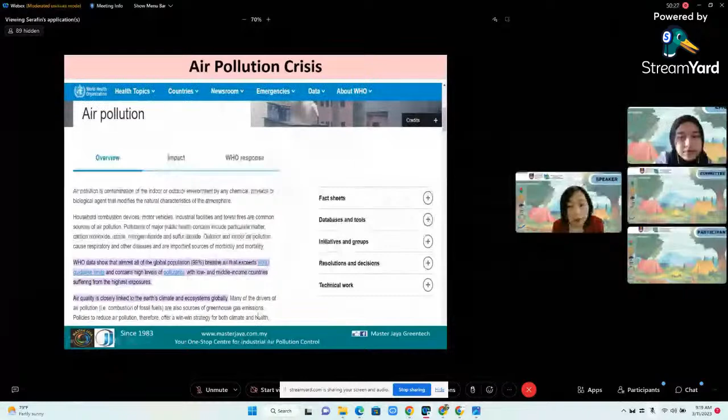This is also from a WHO report. How many people die every year from this? This statistic shows 7 million people die prematurely every year — not accumulated, this is yearly — from both household and outdoor air pollution. 7 million is a very serious, very dangerous, scary figure.

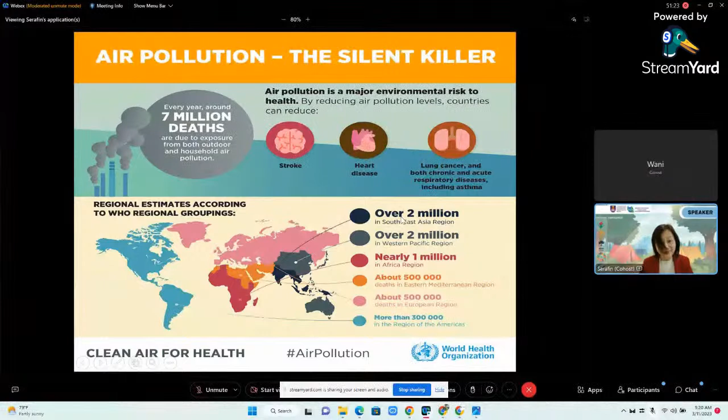Let's see where Malaysia is. Malaysia is here. Out of the total 7 million deaths, let's see who is ranked number one — over 2 million is from Southeast Asia. Where is Malaysia located? We are right in the center of Southeast Asia, which means our air pollution problem in Malaysia is also one of the highest risks worldwide. We are the top on the list.

And look at who is last — of course, the light blue color here represents the American continent, South America and North America. Then the last one is about 500,000, which is from Europe.

If we compare in terms of area, Southeast Asia is one of the smallest continents compared to Europe or America. But sadly, the truth is, although we are one of the smallest in area, our air pollution problem is the most serious in the world. So we have to do something. I'm very happy that UiTM organized this very meaningful series of talks that covers not just air pollution, but water pollution and waste management too.

Let's look at a bit about air pollution. So today in this 1 hour talk, I will focus more on industrial air pollution, about factories and manufacturing plants in Malaysia.

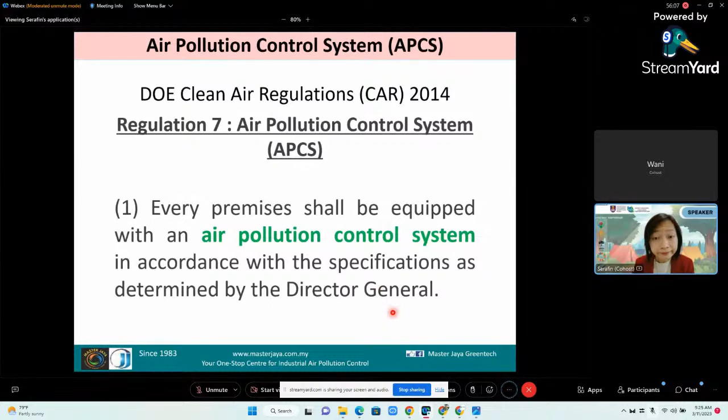So there's another regulation called regulation number 2, interpretation. Interpretation basically means the definition. So in the DOE regulation, what is their definition of air pollution control system? Because regulation 7 says that every factory must install APCS.

So what is APCS? APCS means any facilities designed or constructed for the purpose of preventing or reducing potential emissions that can cause or that cause air pollution, and it must include: number one, extraction system; number two, control equipment; and number three, chimney. These three key components must be included in any air pollution control system.

Let's look at this simple sketch to show, ladies and gentlemen, what an air pollution control system is. Now some of you studying environmental subjects, I believe you also study about air pollution in your courses. Basically, we should have about 5 components in a complete air pollution control system.

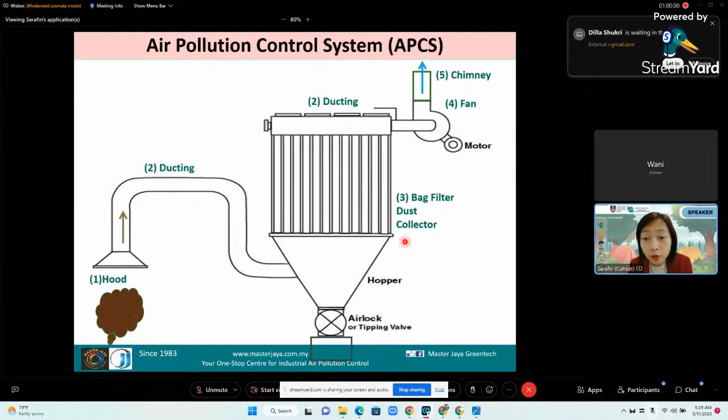So to make it easy for you, I put it as 2 main categories. One category is the type of technology that factories can install to control or filter dust particles. For dust, to control dust particle, we have the types of APCS: number 1, settling chamber; number 2, cyclone; number 3, bag filter dust collector; number 4, electrostatic precipitator; number 5, wet scrubbers. Of course it's not just limited to these 5, we also have other types of APCS, but these are some of the most common ones, most commonly installed in factories.

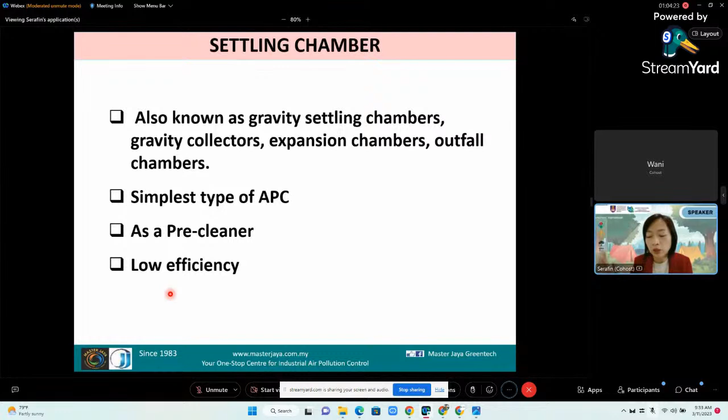Very simple, empty box. Let's say it's just an empty chamber, a big empty chamber. It's an expanded empty box. What do we have inside? Basically nothing, empty. There's no filter, there's no water spray. So that's why we call it an empty chamber, but it's an expanded empty chamber. We expand the size to reduce the velocity, to slow down the speed, to slow down the transport velocity.

So when the velocity has slowed down, what do you think will happen to the dust? Yes, you're right, the dust will slowly settle. So therefore we call this settling chamber. Some people call this gravity chamber, gravity settling chamber, because the operating concept is very simple: let the dust settle by gravity.

Now this type of APCS is good for, now what do you think? What kind of dust? Is it more suitable for heavy dust, or is it better for light, fine dust particles? Yes, you're right, this type of settling chamber is more suitable for heavy dust, big particle, heavy particle. So efficiency will be better for heavy dust and big particles. But if the incoming dust here is all fine dust, very light dust, then this type of APCS is not so suitable.

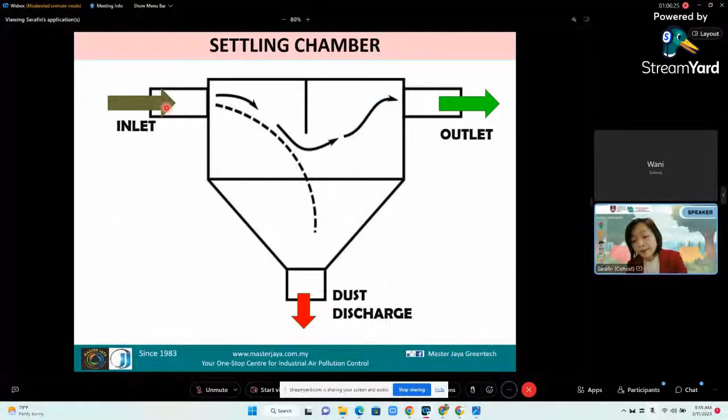Right, second type of APCS is called cyclone. So cyclone is also commonly used as a pre-collector now, after the new clean air regulation was enforced. I still remember which year. So DOE enforced the regulation, clean air regulation, on year 2014. This is the newest clean air regulation.

Now before 2014, did DOE in Malaysia have any law? Yes, of course. So DOE actually enforced the first clean air regulation in year 1978. I think before that, most of you were not born. All right, so in 1978 we already had a clean air regulation. Now that was an old clean air regulation with much looser standard limits.

The limit at that time, for example, for dust particles, was only 400 milligrams. In 2014, DOE totally changed to a new regulation, reducing the dust emission to a maximum of 150. So from 400 in the 70s, 80s, 90s, 2000s, then in 2014 DOE has reduced it.

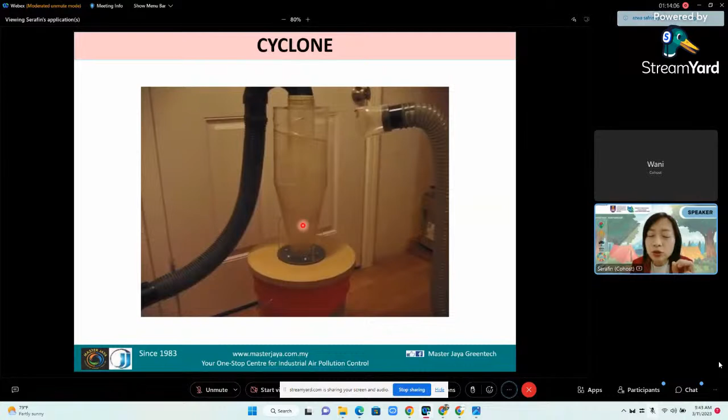But of course, if the dust is too light or too fine, we cannot trap all, or even 90%, of the very light and fine dust, because it can still escape from the clean air outlet.

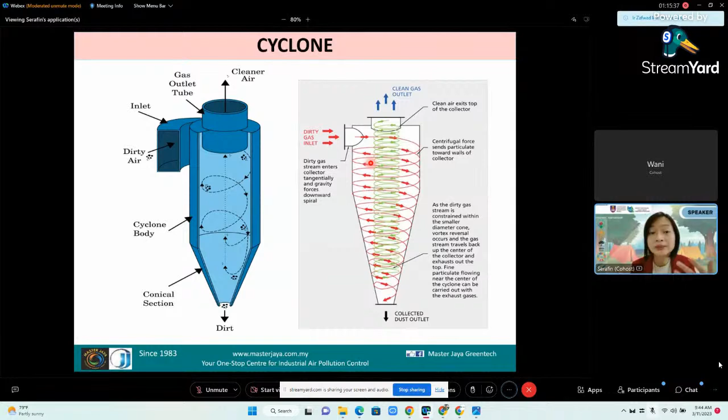So this is not good news. Therefore we say cyclone is not considered high efficiency. We classify it as low to medium, depending on how we design the cyclone. Some cyclones can achieve medium efficiency, but some can only get low efficiency.

Next, let's look at bag filter dust collector. Another name for bag filter dust collector is baghouse, or dust collector, or bag filter. Some factories call it pleated filter or cartridge filter. So there are many different names for this type of APCS.

Operating principle: use filters to separate or filter dust particles from dusty gases. It is one of the most efficient, most cost-effective types of APC equipment, compared to settling chamber, cyclone, which we covered just now, and wet scrubber.

If you want to design a technology or control equipment to filter dust particles, regardless of whether it's fine dust, coarse particle, big particles, small particle, heavy dust particle, or light dust particle, bag filter dust collector is definitely one of the best choices, because it gives the highest efficiency of more than 99%. The filter can trap a minimum of 99%, up to 99.9%, of even very fine dust particulate.

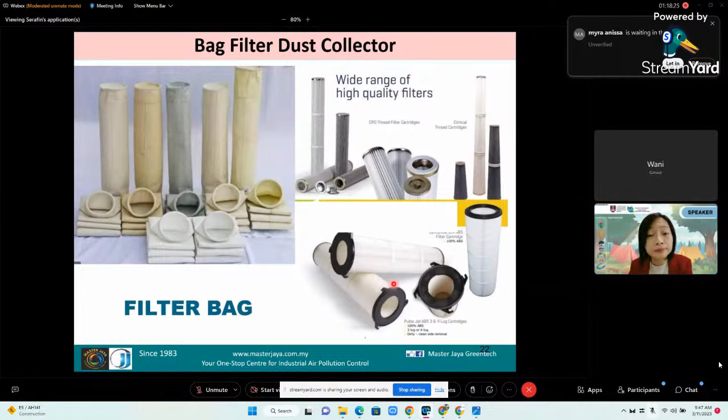So this is how we install the filter in the dust collector. Externally, you will just see a square box, a rectangular box, a chamber. Internally, inside, we install filter bags. We have an inlet for the dirty dust to come in, and an outlet for clean air to release out after filtration. So inside, we have filter bags to trap and filter the dust particles.

Of course, sizes can be custom made. So all the air pollution control systems can be custom made.

So some features of bag filter dust collectors. The advantage of bag filter is it's a dry system, so the dust that we collect will still be recovered dry. For instance, in a plastic factory, they generate plastic dust in a cutting process or a grinding process. If we use a bag filter dust collector, we can collect back the powder in the original dry plastic powder form. So this is one of the advantages.

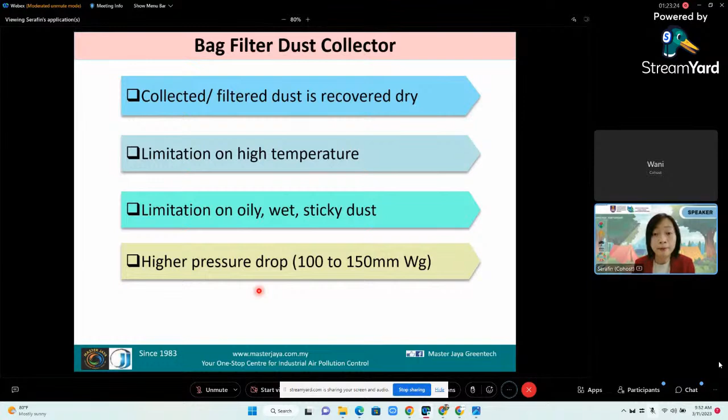So of course, bag filter dust collector must come with an automatic cleaning system. Because the technology we use in the factory needs to cater for continuous process, running 24 hours. Manufacturing normally has to run production 24 hours non-stop. Therefore engineers who work in the plant sometimes work in shifts, morning shift, night shift, because the process cannot afford to stop. It must run 24 hours continuously non-stop.

So ladies and gentlemen, I have a question for you. If we run the dust collector bag filter non-stop 24 hours, continuously dust comes in to the filter and sticks on the filter bag, what do you think will happen? What do you think will happen to the filter?

Now let's look at these filter bags. Inside the dust collector we have filters installed. Dust will come in 24 hours non-stop, the fan runs 24 hours, suction 24 hours non-stop, so the dust will stick on the filter bag non-stop, 24 hours continuously. So what do you think will happen to the filter bag after a few hours? Yes, you're right, the filter will be choked, full of dust.

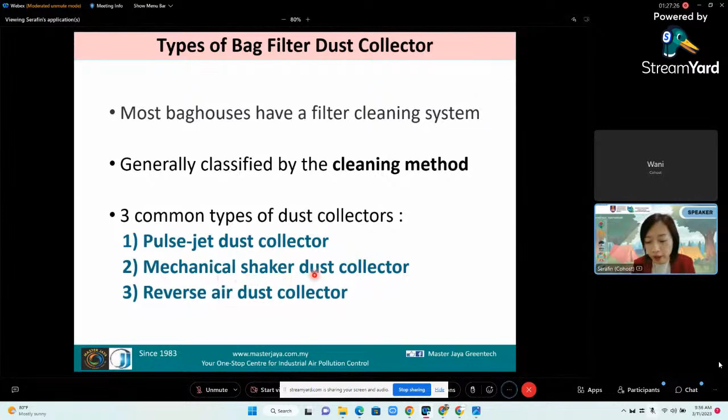Oh my God, the operator has to manually use their hand to shake the filter during the tea break, during the lunch break. So this one we definitely don't recommend because it's very taxing for the operator. High labor, they need to depend on manual cleaning. And if manual cleaning, they can't operate the dust collector 24 hours. They have to stop the filter just for cleaning purposes.

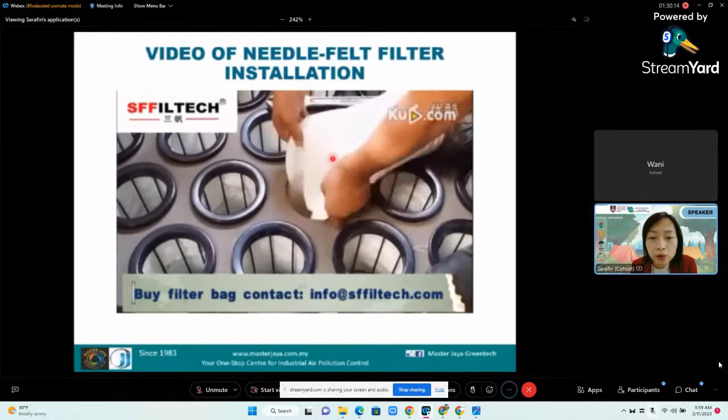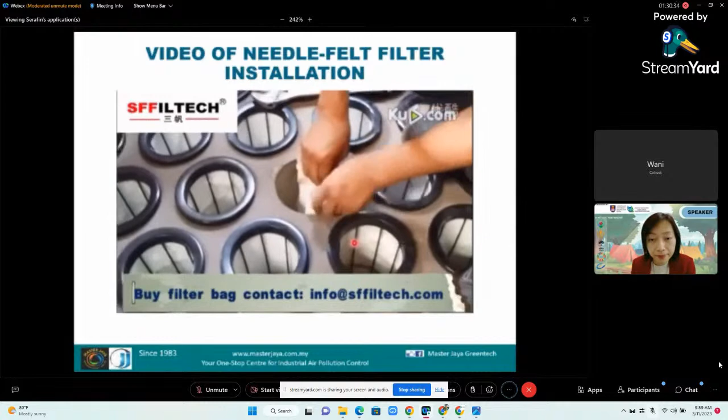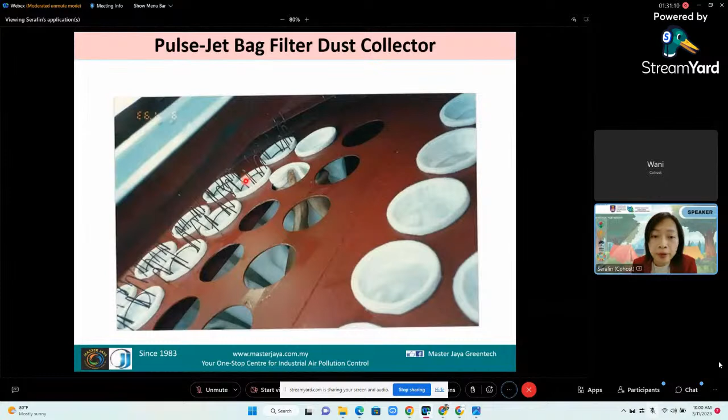Install the bag, make sure it's airtight. Next, slot in the bag cages. So this is how we install the filter. First we slot in the filter, the white color, this is the filter. The top part here has to be airtight to prevent any dust leakages. Then internally we have a support structure to support the shape of the filter. This component we call bag cages.

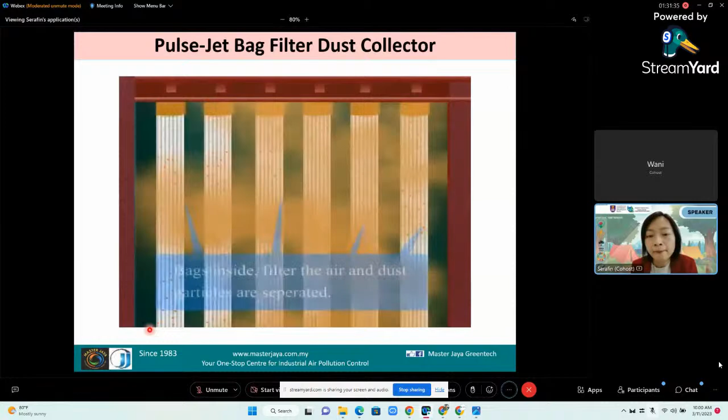Okay, an animation to show you how a pulse jet bag filter works. First of all, on your bottom left hand side, this is the incoming dust coming from the ducting. We call this inlet ducting from the process, from the machine, cutting process, grinding process, from the furnace. So dust will come in and stick on the surface of the filter bags. This is how the dust is separated, using the filter to trap the dust particles.

So clean air, filtered air, will pass through the filter, go up to the clean air chamber on top. Then the clean air or filtered air will release and escape out. Here we have an outlet, we call this the clean air outlet. The clean air outlet is normally connected to a suction fan, and then to a chimney.

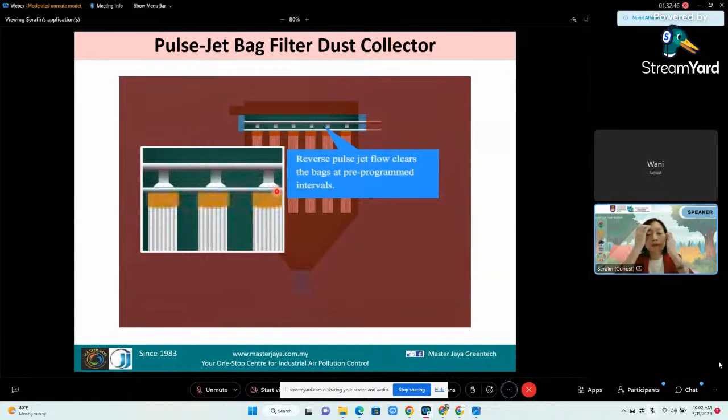Now inside, on top of the clean air chamber, we have pipes. These pipes are for compressed air to come in, to blow in and supply compressed air onto the filter bag. Once compressed air is blown on the filter bag, it is being cleaned. This is the compressed air purging, blowing, or pulsing on the filter. Now, every time we blow compressed air, the filter will actually expand, creating vibration for the dust to release from the filter.

So the dust will drop. Dust particles accumulated on the filter bags will get detached and fall into the hopper after the pulse jet cycle - meaning the compressed air cleaning cycle. This component at the bottom, the pyramid or cone shape, is called the hopper. The dust will drop into the hopper and then discharge out. Of course, we don't let the dust just drop onto the floor - in the factory we install a proper dustbin to collect all the dust particles.

So this is how a bag filter dust collector works. This is one of the most important, most widely used technologies in the industry now to filter dust particles. So I will spend more time on this because it's the most common one you will see in the factory. It's suitable for 24 hour continuous process - meaning during the pulsing, during the cleaning, when compressed air blows in, we do not need to stop the suction fan.

We don't need to stop the fan in order for the compressed air blowing. No, suction and compressed air cleaning will operate together concurrently. Therefore, we say this pulse jet dust collector is suitable for 24 hour operation, continuously non-stop. It will not affect the production downtime, and production don't need to stop just for the purpose of cleaning.

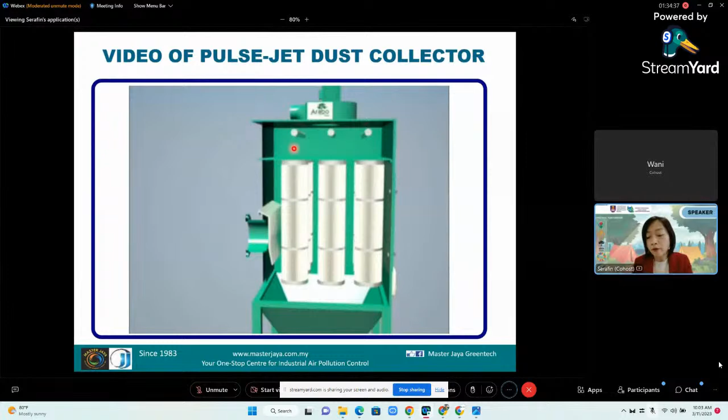So this technology is designed for 24 hour continuous process. This is one of the most commonly used types of technology, applied in almost every industry for powdered and granulated material, high efficiency, 99% and above. You name it from A to Z, all kinds of powders. Our group, Master Jaya, we have designed, supplied, and installed more than 1,000 sets of bag filter dust collectors to various industries, A to Z: aluminum, asbestos, carbon, cement, ceramic, chemical, flour, food industry, glass, pharmaceutical, plastic, sugar, tobacco, wood, metal processing, and many, many others.

So here, I just want to share some of our installations of bag filter dust collectors in a factory. There are two types of APCS technology installed here, A and B. A is a pre-cleaner, an empty chamber, no filter inside. A is an empty chamber, pre-cleaner.

B, inside B we install filters, we have filter bags. So ladies and gentlemen, do you know the name of this technology? What is A and what is B? The answer is yes, A is a settling chamber.

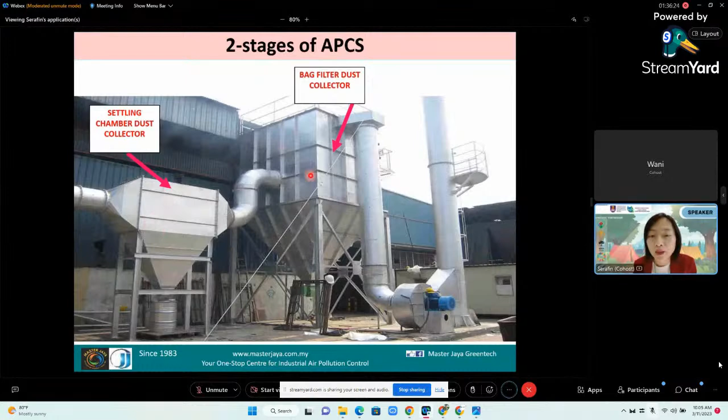Now, what about this one? We have A and B, two different technologies, two different types of APCS, both for dust particles. B, just to give you a tip, B is a pre-cleaner, empty cylinder. Inside B has nothing, no filters. B is empty. So do you know what is B? A, inside A we have filters. So I think you can guess already by now what is A and what is B.

Yes, you're right, A is a bag filter dust collector, B is a cyclone. Now, so which one will the dust enter first? Will the dust go into the filter first, then to the cyclone? Or go into the cyclone first, then to the bag filter? Yes, the answer is definitely the dust will enter the cyclone first, because cyclone is a pre-cleaner to remove the heavy dust particles and the big particles.

The fine dust from the outlet of the cyclone will then escape. Then only we go into a bag filter to remove the balance, 99%, 99.9% of the fine dust, all trapped by the filter. Then clean air escapes. So this is one of the very common types of technology installed in industrial premises.

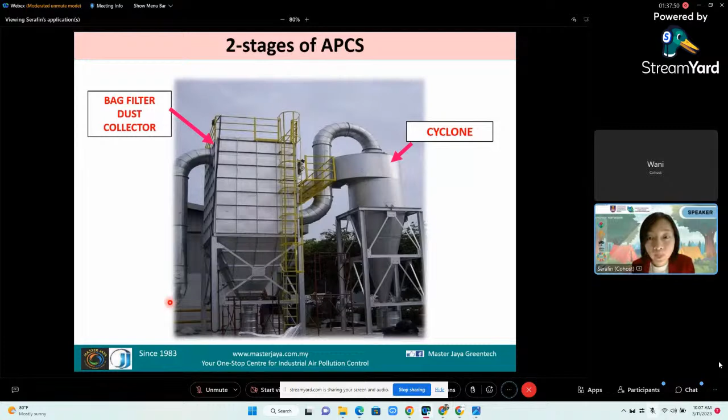The next type of APCS that I would like to share with you is the wet scrubber. Due to time constraint, I can only share more on this bag filter and scrubber. Wet scrubber is also another very common type of technology installed in factories. The difference between wet scrubber and bag filter dust collector is one is a dry system. Bag filter dust collector definitely is a dry system, used for dust filtration, mainly for dust filtration.

Wet scrubber, no filter, they don't use filter. There's no centrifugal for spinning. It uses liquid, it uses water. We spray water in a wet scrubber, we supply water, we pump water in a wet scrubber. We use water to absorb, to remove the pollutants. What are pollutants? Both - we can use it to treat gaseous pollutants, like acid gas, alkaline gas, sulfuric acid, hydrogen chloride, chlorine gas.

Wet scrubber can be used to trap dust particles, and at the same time also used to trap gaseous pollutants - 2-in-1. Can be low, can be high pressure drop, because there are many different types of wet scrubbers. Disadvantage of wet scrubber is definitely, yes, you need water, you need continuous supply of water, because we use water to absorb the pollutant. It's an absorber basically, so therefore wet scrubber can also be called an absorber, using liquid water to absorb the pollutant.

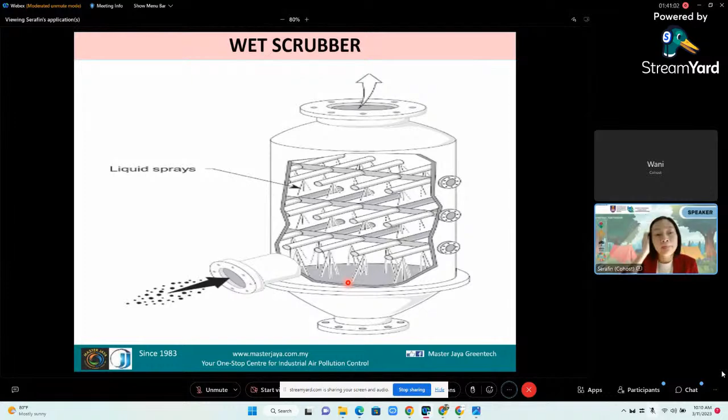Okay, so this is how a scrubber looks like. We have an inlet for the pollutant gas or dust particle to enter, and an outlet for the clean air to exit out to the fan, to the chimney. Internally we have several components, including spray nozzles to spray water. We use water to absorb the incoming pollutants, gases, acid, ammonia gas, chlorine gas, dust particles.

All kinds of gaseous pollutant - wet scrubber is more commonly used in the factory to trap gaseous pollutant, or also to trap some dust particles which are not suitable to use a filter for, for example too oily dust, too sticky dust, too wet dust. If I use a filter, my filter will get choked very fast, so another option is to use a wet scrubber.

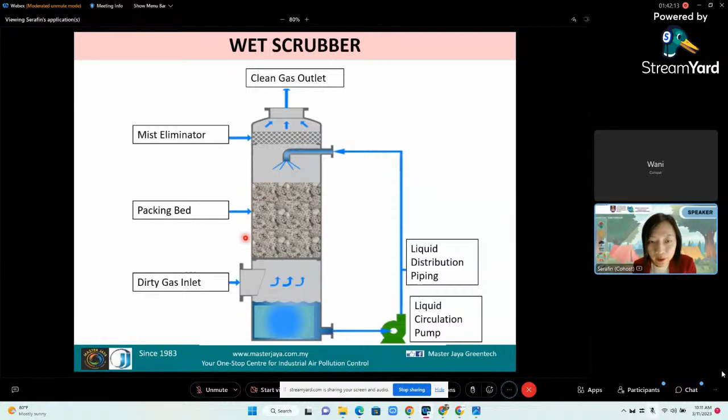Sometimes to increase the scrubber efficiency, we will also add a component called packing inside the wet scrubber. Packing looks like this. The purpose of the packing is to increase the absorption surface area, so with this packing it will again increase the efficiency of the wet scrubber.

All right, I think I'll stop here because the other types of APCS, the other technologies, are not so popular, not so commonly used. Okay, maybe I'll just go through them very quickly.

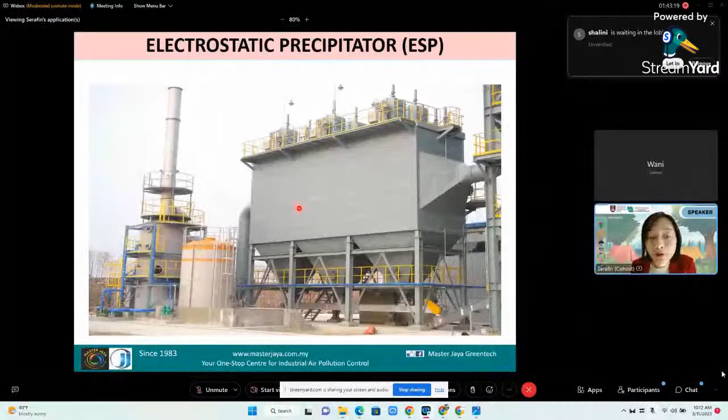So this is the dust inlet, and on the other side is the clean air outlet. ESP is used to filter dust particles, not for gas. ESP is not common, very uncommon, not popular at all. Only certain industries, like cement plants, power plants, glass smelters, and nowadays palm oil mills, start to install ESP.

But cement plants and even power plants are starting to convert and upgrade the ESP to bag filter dust collectors, because comparing efficiency and reliability, bag filters have a slight advantage over ESP. Some cement plants in Malaysia and worldwide installed ESP 20, 30, 40 years ago, but nowadays most cement plants and power plants try to convert and upgrade to the better technology, which is a bag filter dust collector.

The advantage of ESP is there's no filter, there's no water spray inside, so it is suitable for high temperature applications.

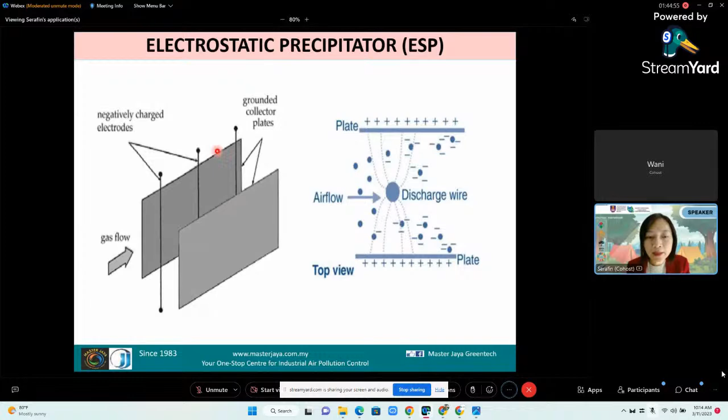Inside the ESP we have positive and negative electrodes, because electrostatic charging basically uses the positive and negative charge concept to collect the dust particle. In the center we have the negative electrode, which we call the discharge electrode. At both sides, left and right, we have plates, normal metal plates, which we call the positive electrode.

Electrostatic principle says opposite charges attract - if you have one positive and one negative, they will tend to stay together, attracted to each other. So dust coming into the ESP gets charged and becomes negatively charged, then the negative dust is attracted and sticks onto the positive plate. This is how the dust is removed, trapped, or filtered in an ESP.

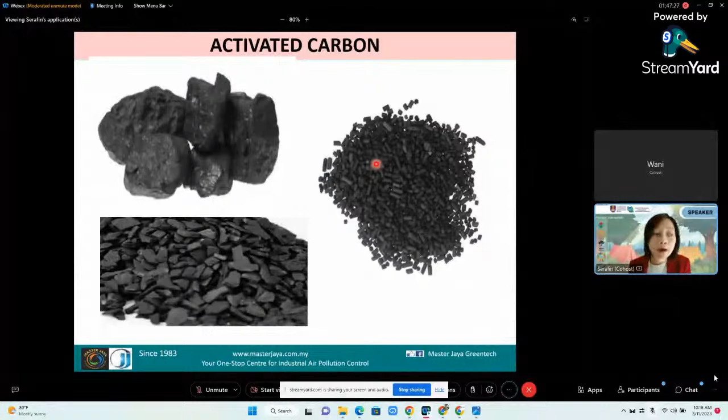We also have carbon in this panel, like a filter, like a material, filter fabric material, like a paper material.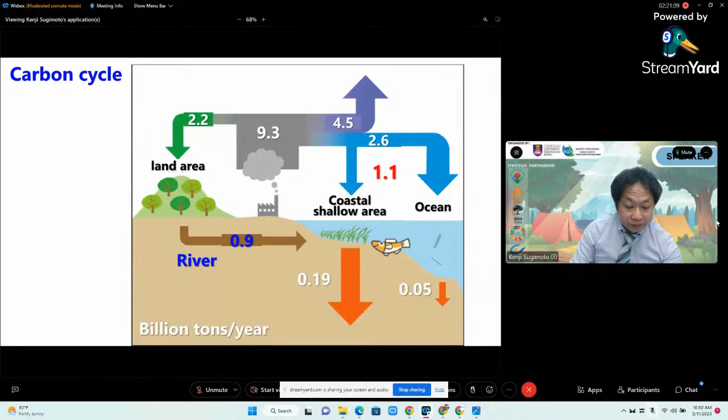This is carbon fluxes in the oceans. The flow of carbon dioxide across the air-sea interface is a function of carbon dioxide solubility in seawater. The amount of carbon dioxide dissolved in seawater is mainly influenced by physical-chemical conditions and biological processes, primary production. The solubility pump and the biological pump enhance the uptake of carbon dioxide by the surface ocean, influencing its dissolved carbon dioxide values and transferring carbon to deep waters. All these mechanisms are strongly connected, balanced, and influential to the ocean's capacity to sink carbon. The net effect of the biological pump itself is to keep the atmosphere concentration in balance.

So what would it be? It is a balance.

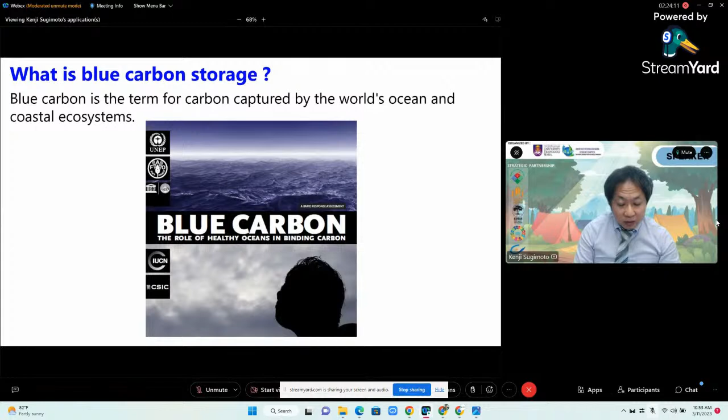When we protect the carbon in coastal systems, we protect healthy coastal environments that provide many other benefits to people, such as recreational opportunities, storm protection, and nursery habitat for commercial and recreational fisheries.

This shows the carbon cycle in the sea. The function of the seagrass bed, including seaweed beds, is to absorb carbon dioxide, fix it as organic carbon in the seagrass body, and store it in the sediment. In order to lower the concentration of carbon dioxide in the atmosphere, it is necessary to lower the carbon dioxide concentration in the seawater by storing it in the sediment.

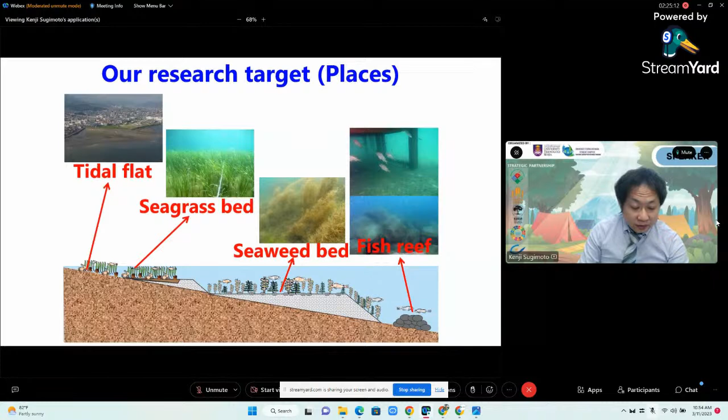Seaweed and seagrass beds have a community with a dense expansion of large marine plants such as algae and Zostera marina. They contribute to the purification of water quality and the maintaining of biodiversity.

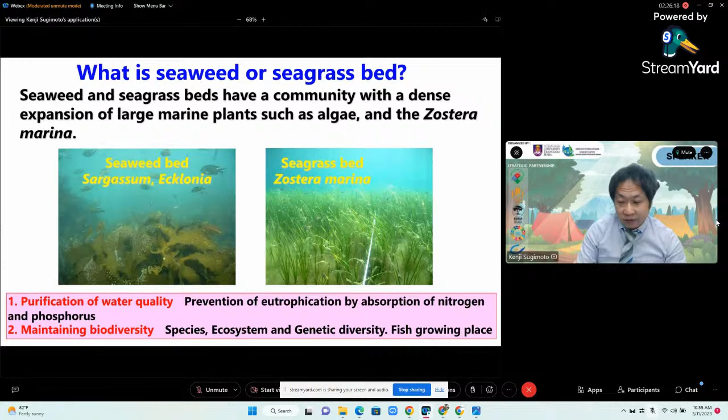Our goal is reproduction of seagrass and seaweed beds and gathering of useful fish, maintaining biodiversity within these beds. Our purpose is to understand the growth conditions of seagrass or seaweed and evaluate that growth, to improve the environment by eliminating growth-inhibitory factors, and to relieve useful and inexpensive materials for making seagrass and seaweed beds, and to clarify why the restoration of seagrass and seaweed beds is not progressing in Japan.

This graph shows changes in seagrass or seaweed bed area in the Seto Inland Sea in Japan. In 1960, the seagrass bed, which was 23,000 hectares, decreased to less than one-third in about 10 years and has not recovered. On the other hand, reclamation has been done in the Seto Inland Sea since 1970.

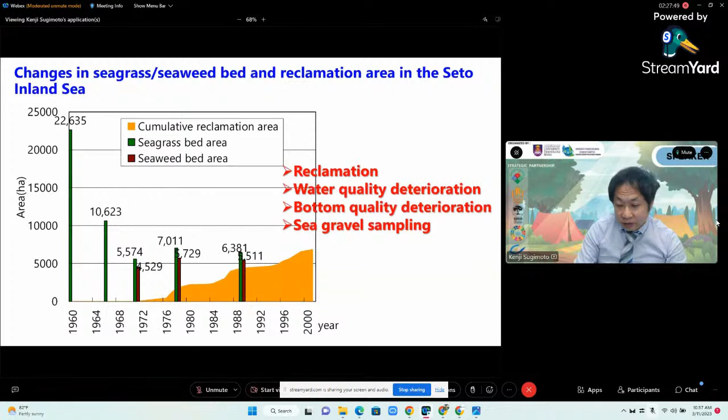Next, I'd like to talk about understanding the growth conditions of seagrass and evaluating that growth. This figure shows the physical factors of distribution and growth of seagrass.

We think of three points. One is the seagrass bed, which supplies seeds, should be located in the neighborhood. Two, it is being in the hydraulic conditions to which seeds are supplied. Three, seagrass habitat suitability, which is physical and chemical factors.

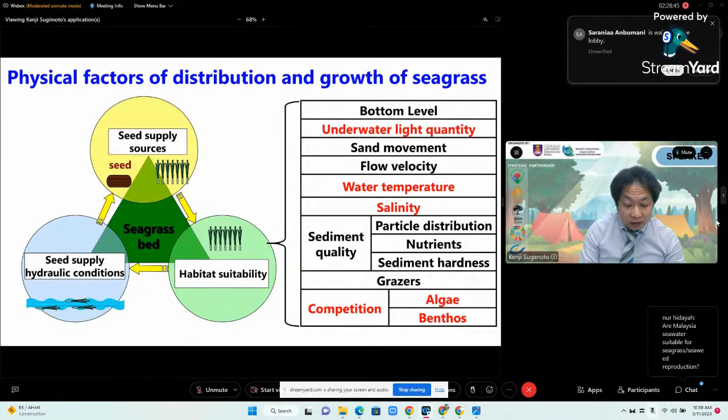So we compared environmental conditions between seagrass bed and bare area. This is our main study site, Iwakuni in Japan, located near Hiroshima.

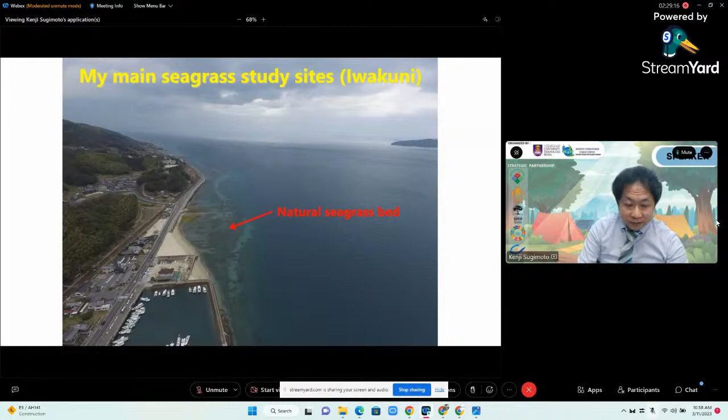Seagrass at Iwakuni are two species: one is Zostera japonica, the other is Zostera marina. Zostera japonica distributes from the middle intertidal zone to the subtidal zone. Zostera marina distributes from the low intertidal zone to the subtidal zone, deeper than Zostera japonica. Shoot height of Zostera marina is higher than Zostera japonica.

This graph shows seasonal water depths and percentage of seagrass occurrence during February 2004, 2007, and October 2013 in Japan. Red symbol is Zostera marina, and blue symbol is Zostera japonica. The x-axis is water depth.

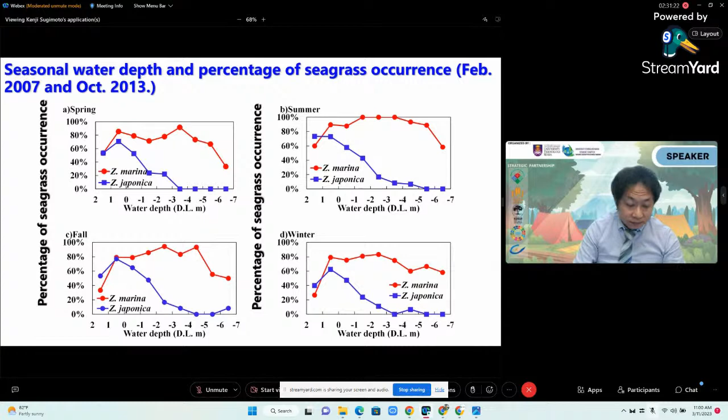This graph shows change in the occurrence and density of seagrass at two optional water depths during February 2007 and October 2013. Red symbol is Zostera marina and blue symbol is Zostera japonica. The density of Zostera marina was more than 100 shoots per square meter, except for February and April 2012.

Although it is not shown in this graph, there was no Zostera japonica in 2007. However, the shoot density of Zostera japonica increased after December 2010, and that decreased after February 2012.

In this study site, the shear stress was reduced in deeper water under calm water conditions, and diatoms and sediment adhere to the leaves of Zostera marina and Zostera japonica.

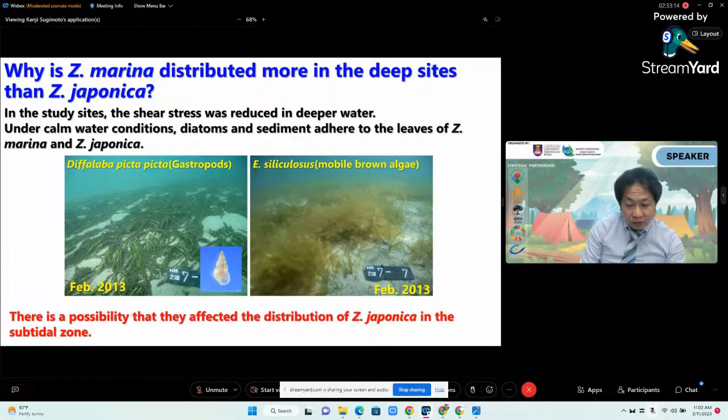This picture shows gastropods, clams, and mobile brown algae in the study lines. There is a possibility that they affected the distribution of Zostera japonica in the subtidal zone.

The purpose of this part of the study is to investigate the long-term change and seasonal change of the bare field formed inside the seagrass bed, and clarify the cause of bare ground formation. So we decided to investigate the physical environment, such as the bottom sediment and the flow, of the seagrass bed and the bare area, and we transplanted and seeded at the bare area to clarify the cause of bare ground formation.

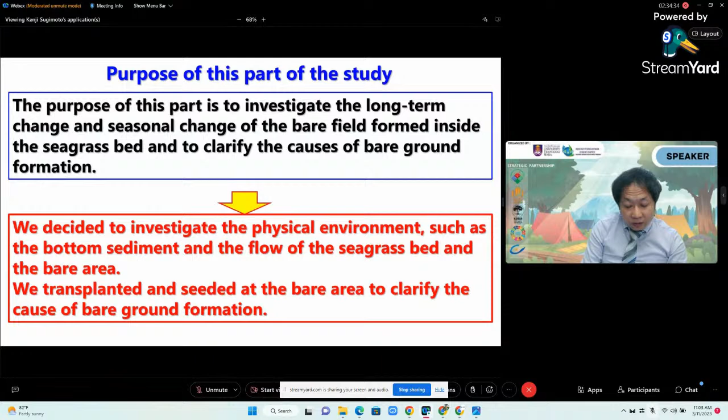When we researched these areas, we dove to check the seagrass density and seagrass height, and sometimes we collected seagrass to measure the weight.

We took photographs using the drone, from November 2014 to February 2017, and analyzed where Zostera marina distributes.

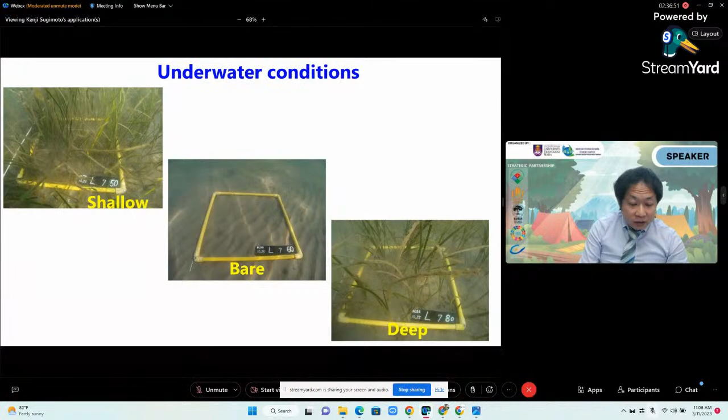We hypothesize that both times they ate the upper portion of the seagrass, especially Zostera marina, compared to Zostera japonica.

The graph shows Zostera marina and Zostera japonica shoot height results. In fall 2016, the Zostera marina shoot height was shortened due to damage from feeding. But in March 2017, seedlings of Zostera marina were distributed.

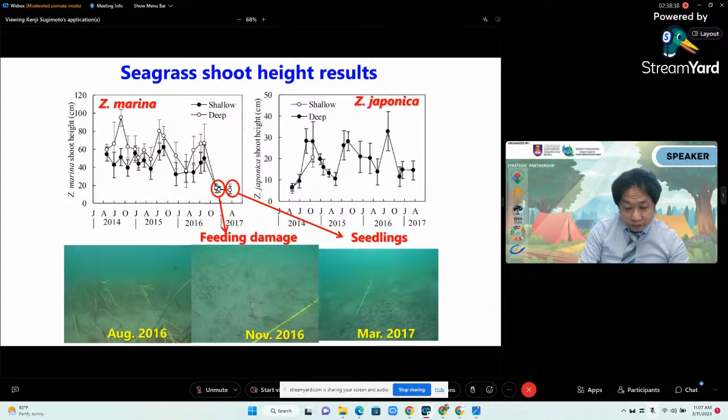These graphs show the result of transplanting in June 2015 and a seeding test in November 2015, with underwater photographs from that time. At 2 months after transplantation, shoot densities of Zostera marina decreased at all points, but the bare area almost disappeared. Germination of seeds in the seagrass bed was confirmed, but could not be confirmed in the bare area.

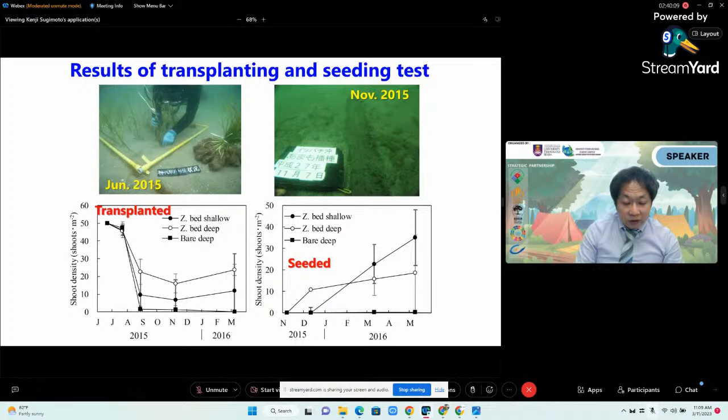This graph shows the relationship between Zostera marina shoot density, height, and flow velocity. There is a negative relationship between shoot density and flow velocity, and between shoot height and flow velocity, so it can be inferred that flow velocity is not a sufficient condition to determine the distribution of seagrass.

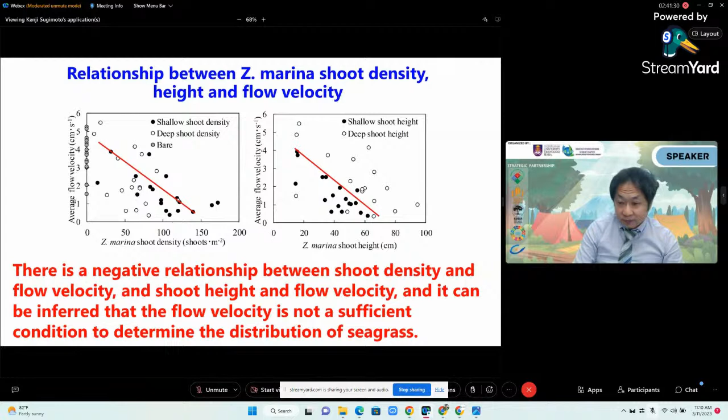The next point I'd like to talk about is environmental improvement to eliminate growth inhibitory factors. Before the presentation, we checked the condition of where seagrass distributes. In this part, I showed the type of seagrass restoration in Japan.

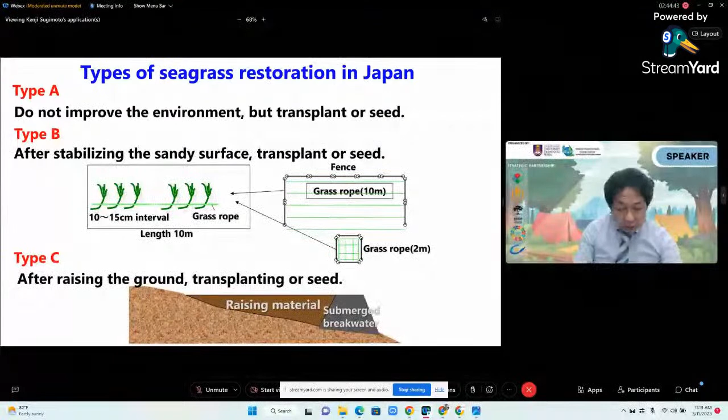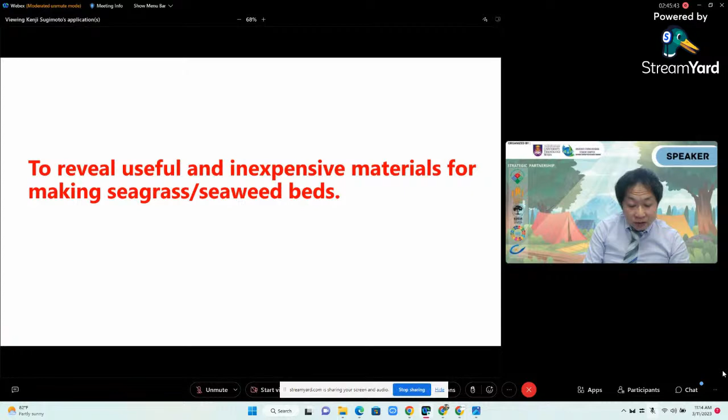The next point I'd like to talk about is to reveal useful and inexpensive materials for making seagrass or seaweed beds. If there is a lack of light conditions for seagrass or seaweed at the undersea ground, we improve light conditions by raising the underwater ground using sand or rock. Basically, in sand, seagrass distributes; in rock areas, seaweed distributes.

This is conventional seagrass and seaweed bed creation materials: natural rock used for breakwaters and seaweed beds, sea sand or dredged soil used for seagrass beds. However, they are becoming difficult to obtain.

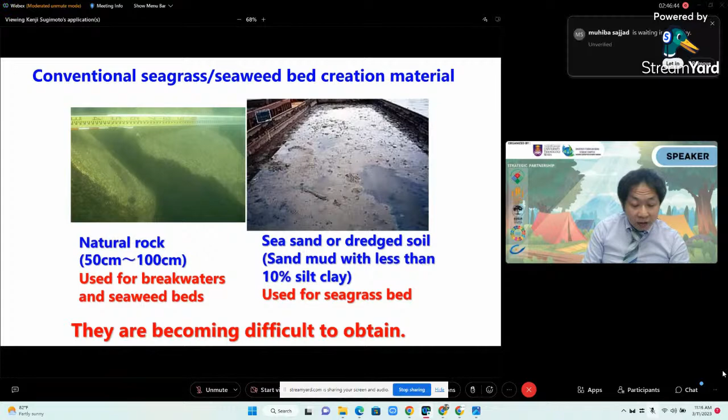This picture shows an image map of an artificial seaweed bed. We constructed the artificial seaweed bed between the natural seagrass bed and fish reef, uniting the ecosystem connecting the existing fish reef further offshore and the seagrass bed closer to shore.

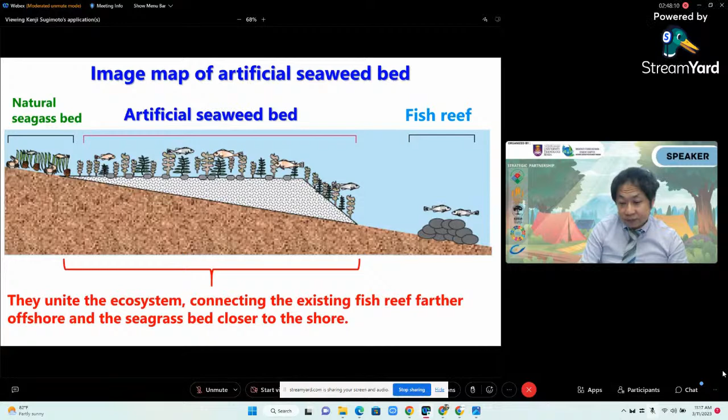This part of the study concerns seagrass bed construction materials: to evaluate whether seaweed forms naturally without transplanting and fixes in the artificial substratum, and whether the bed is functional in attracting fish, by comparing the physical difference between prepared material and natural material located nearby. Second, to evaluate the functionality of seaweed beds by analyzing the effects of an uneven shape of seaweed substratum at about 50 centimeters on fish attraction.

Evaluation method is impact on the surrounding environment, formation of the seaweed bed, and function of the seaweed bed.

This picture shows construction materials for seaweed substratum: steel-making slag and lower alkalinity steel-making slag, which are new seaweed substratum materials being studied. Natural rock and artificial rock are reference materials, as those are traditional seaweed substratum materials.

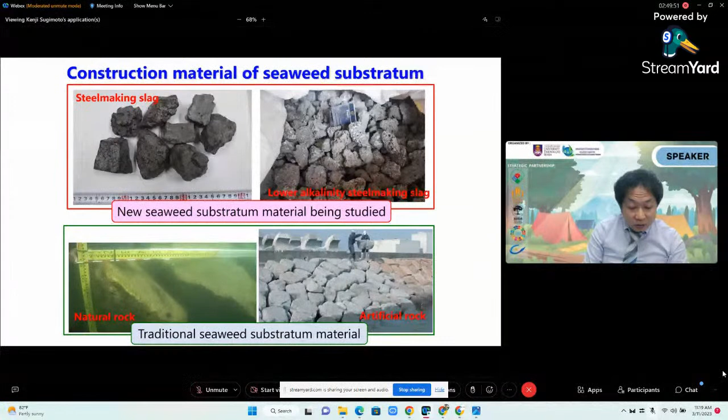This table shows the construction of the seaweed substratum. We performed the construction 4 times, covering about 36,000 square meters using 120,000 cubic meters of steel-making slag, from 2013 to 2018. The first construction was to study the possibility of using steel-making slag.

The second construction was to study the physical and chemical differences of steel-making slag. The third was about the possibility of using ferromanganese slag, a different type of slag. The fourth was to study biodiversity.

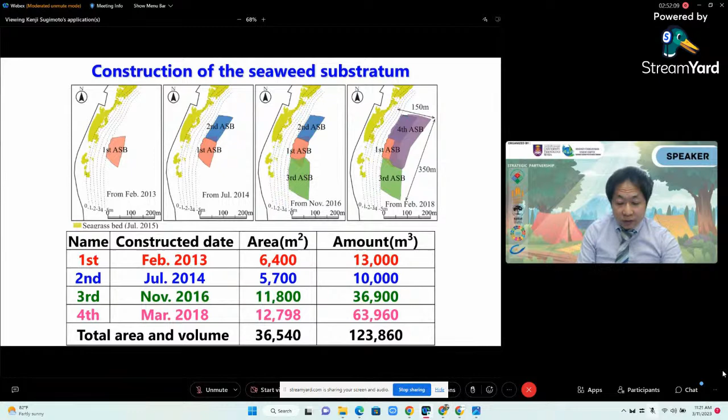In November 2014, the average cover rate became higher than the surrounding natural seaweed bed.

This picture shows change in natural seaweed around the artificial seaweed bed. Kurome is one species, a dominant species in the surrounding natural seaweed bed.

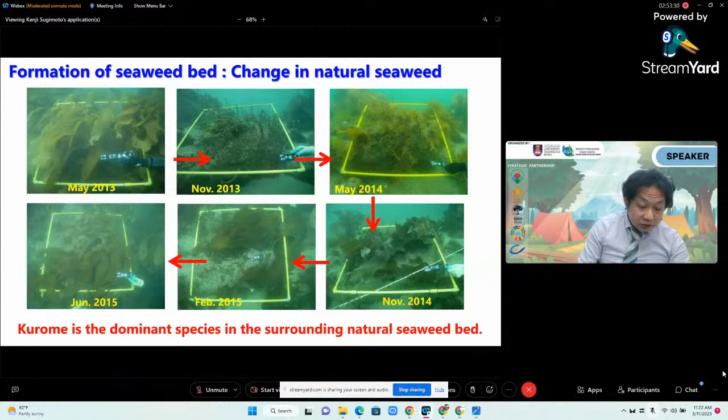The attached biomass in the converter furnace steelmaking slag substratum is typically larger than in natural rock, artificial rock, and surrounding natural seaweed beds, and it functions as a feeding ground for fishes, similar to surrounding natural seaweed beds.

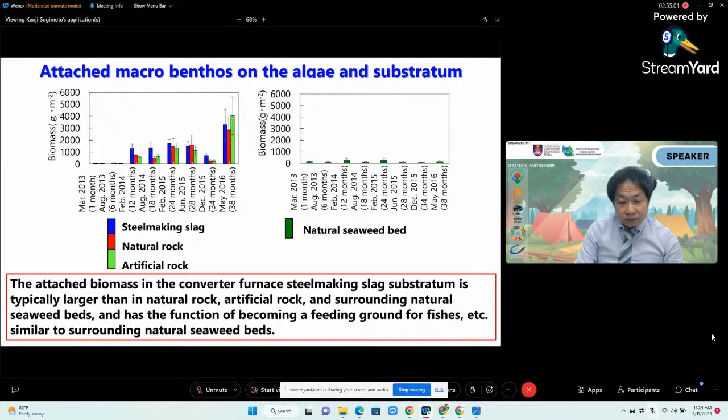There were a lot of evil stingers and firefish. The evil stinger is a very expensive fish in Japan.

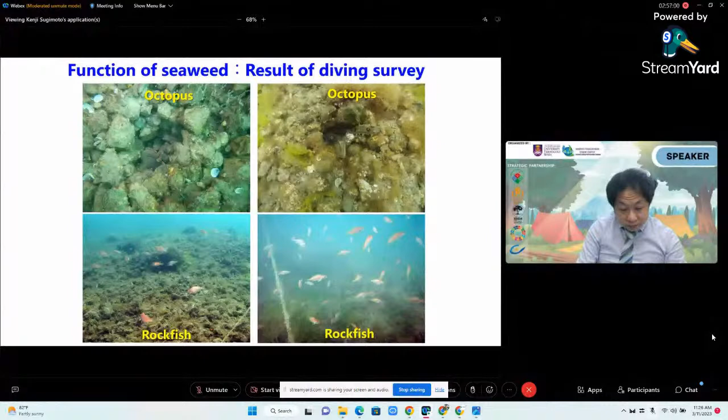This is the picture. Okay, so the next point.

I'd like to talk about and clarify why the restoration of seagrass or seaweed beds is not progressing in Japan. This concerns studies on regulations for the seagrass bed and tidal flat environment and development.

It is necessary to consider the fact that the foundation does not deteriorate due to outflow from physical conditions, and the structural and biological conditions maintained on the foundation can support creatures such as algae and bivalves.

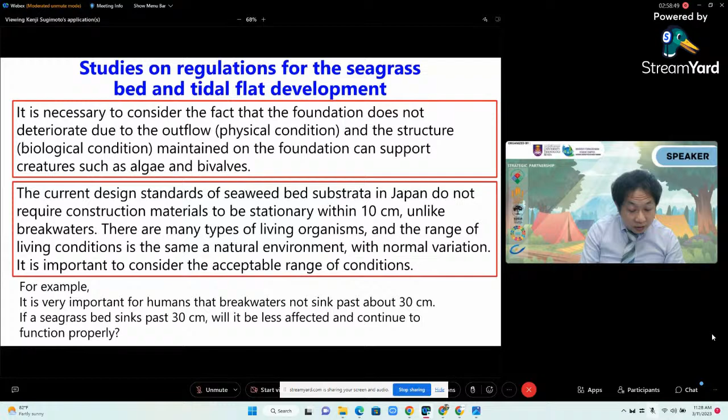The current design standards for seaweed bed substrate in Japan do not require construction materials to be stationary within 10 centimeters, unlike breakwaters. There are many types of living organisms and ranges of living conditions in the same natural environment with normal variation, so it is very important to consider the acceptable range of conditions.

This concerns setting regulations for seagrass beds and tidal flats. First, material safety and characteristics. I don't have time to explain everything, but all materials used for seaweed bed construction must meet safety standards, and the grain size of substrate material must be within the range where the target organisms can live.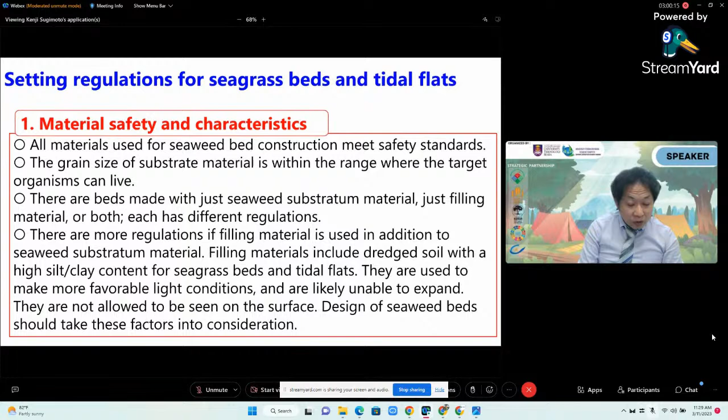Second, securing the function of seagrass bed and tidal flat, it is important to achieve the growing conditions of organisms. Growing conditions vary depending on the type of organism, so it is necessary to narrow down which organisms are targeted. In order to secure the function of the seagrass bed and tidal flat, it is important to maintain the substratum both vertically and horizontally. Function may change depending on the thickness of the seagrass or seaweed substratum, so we are thinking about deformation of the substratum and the original ground outflow.

The final point I'd like to talk about is how to analyze the origin of organic carbon in sediments. Although there are many studies on the amount of carbon dioxide absorbed by seagrass or seaweed, it is unclear what the origin of the carbon stored in the sediment is and how much seagrass beds contribute to it. Methods for investigating the origin of seagrass include genetic distance between seagrass beds, carbon and nitrogen stable isotope ratio, and environmental DNA. It is difficult to quantitatively evaluate the origin of organic carbon in sediment by any single method.

I will explain about the stable isotope. Carbon and nitrogen have stable isotopes with different mass numbers, but the ratio differs depending on the environment in which the plant grew and the organism that the animal ate. Therefore, the fate of seagrass or seaweed is clarified using the stable isotope ratio as an index.

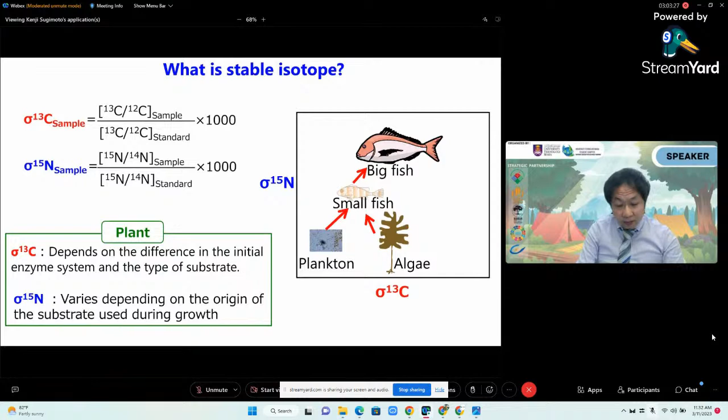Next, I will explain about environmental DNA. Environmental DNA is derived from living organisms released into the environment. By collecting and analyzing environmental DNA, it is possible to quantify the presence or absence of organisms and the amount and number of individuals.

The purpose of this part of the study: although some studies have already used environmental DNA to evaluate the amount of seagrass DNA in sediment, the contribution of seagrass to carbon content cannot be quantified from the amount of eDNA alone. So the purpose of this study is to clarify the relationship between the amount of DNA and organic carbon content of seagrass in simulated sediment in a laboratory experiment, and to estimate seagrass-derived organic carbon uptake in sediment using environmental DNA and stable isotope in Hiroshima Bay, Japan.

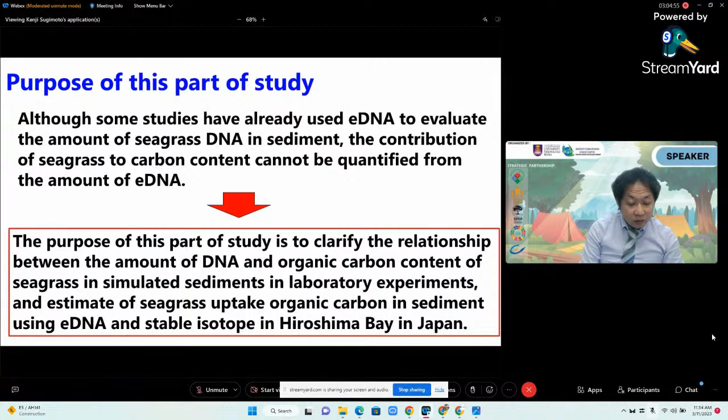This is the study site. We studied in Hiroshima Bay, obtaining samples from the seagrass bed sediment area, offshore sediment area, and river. In the seagrass bed, we obtained sediment, seawater, and Zostera marina. In the offshore sediment area, we obtained sediment. In the river, we obtained river water. We analyzed organic carbon content from the sediment and Zostera marina, stable isotopes from the sediment, seawater, river water, and Zostera marina, and eDNA from the sediment.

This is the method of the laboratory experiment. Zostera marina, simulated sediment, and artificial seawater were placed in a 15 milliliter tube and shaken at 20 degrees Celsius. We used kaolinite and glass beads as simulated sediment, removing organic carbon from it by treating at 900 degrees Celsius or using hydrogen peroxide before putting it into the tube. Sampling was performed periodically from 14 days to 413 days. After extracting DNA from the simulated sediment, we quantified Zostera marina DNA by quantitative PCR. Finally, after freeze-drying the simulated sediment, the amount of organic carbon was quantified.

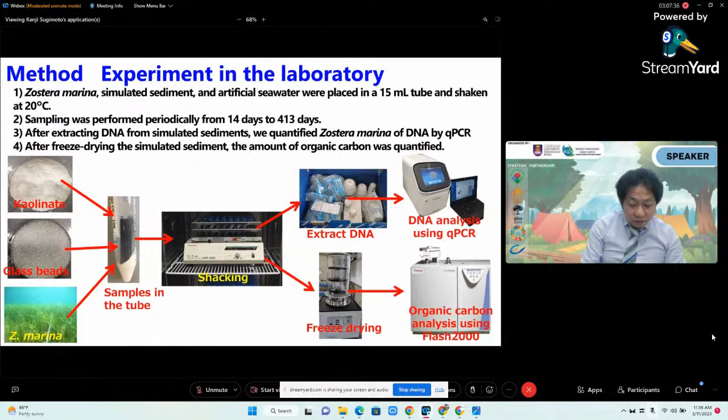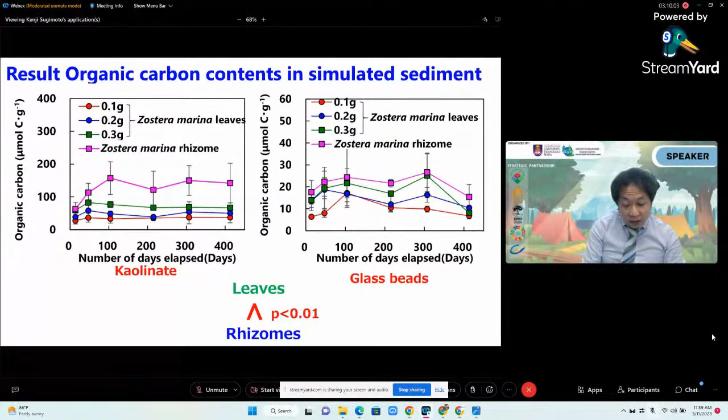They are the results of carbon and nitrogen stable isotope analysis. The sediment area offshore was close to the phytoplankton-derived carbon of seawater, and in the seagrass bed sediment, the terrestrial carbon in river water and Zostera marina were different from those in the offshore sediment. It was suggested that the carbon origin in the offshore sediment area was higher from seawater phytoplankton origin than from land or seagrass origin.

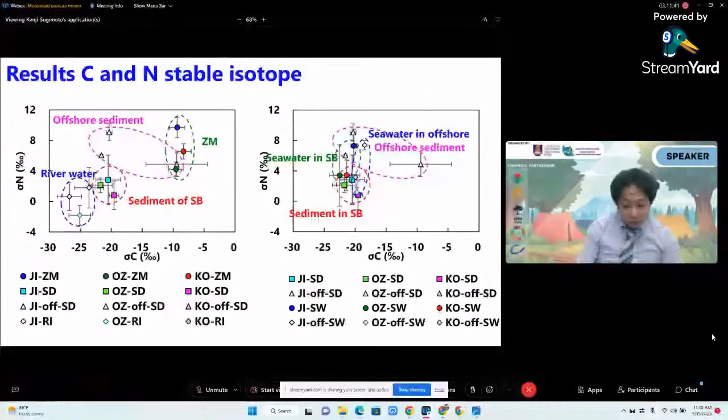So this concludes my presentation. Now this is the quiz. I prepared three questions.

What is blue carbon storage? Secondly, what are the conditions for seagrass growth? Thirdly, how do we make a seagrass or seaweed bed substrate dam?

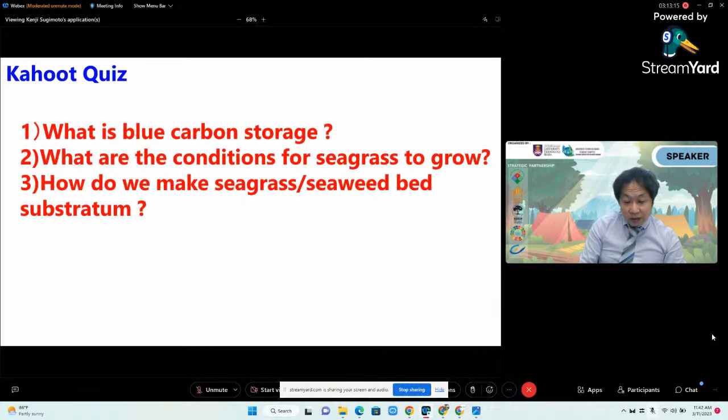The answer is, blue carbon is the term for the carbon captured by the world's oceans and coastal ecosystems. Seagrasses, mangroves, and salt marshes along our coast capture and hold carbon, acting as something called a carbon sink.

The second question: what are the conditions for seagrass to grow? One, a seagrass bed which supplies seeds should be located in the neighborhood. Second, there must be hydraulic conditions suitable for seeds to be supplied. Third, seagrass habitat suitability, which involves physical and chemical factors.

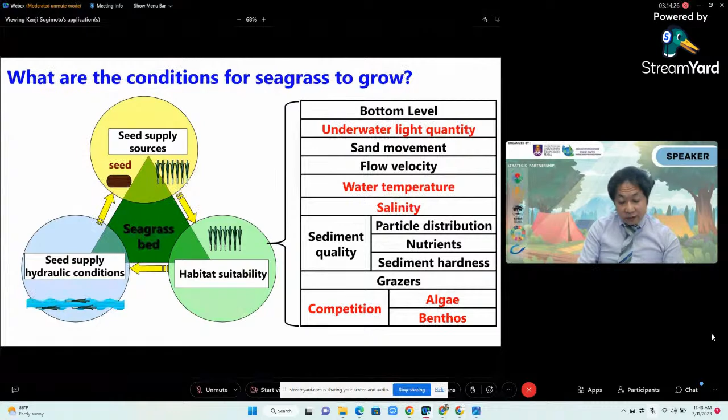So we compared environmental conditions between the seagrass bed and bay area. We improved light conditions to raise the undersea ground using sand or rock. But recently we have studied recycled materials, especially steel-making slag and dredged soil.

So this concludes my presentation. Thank you for listening to me for so long. Thank you.